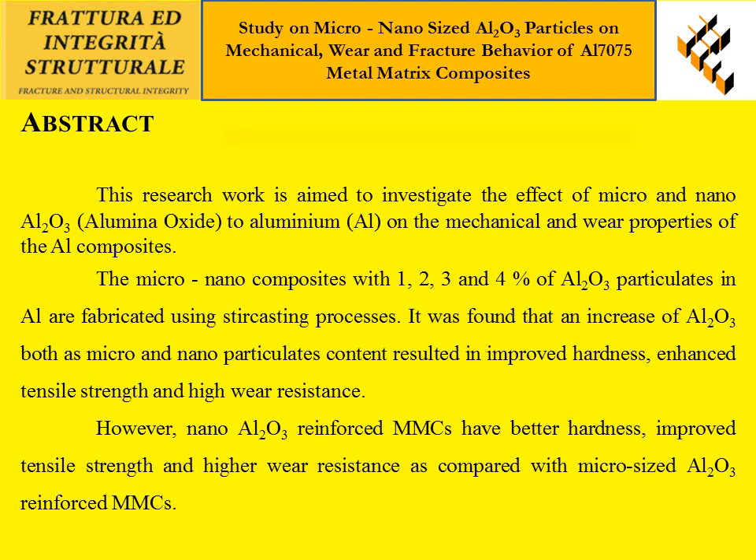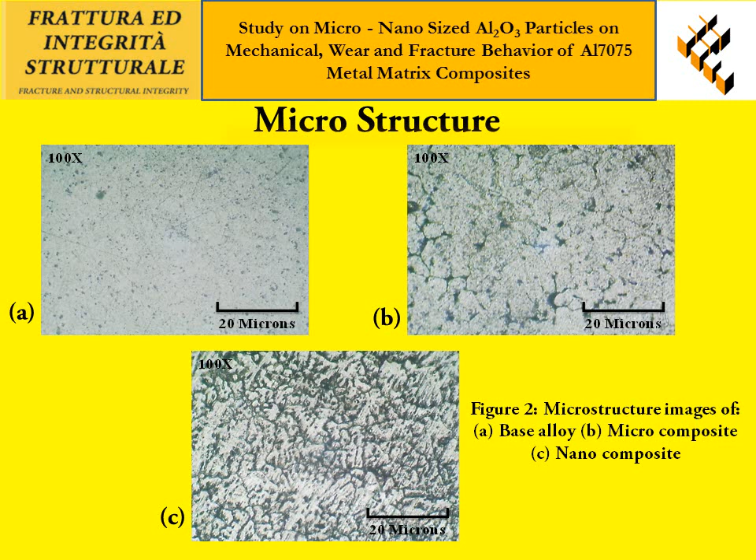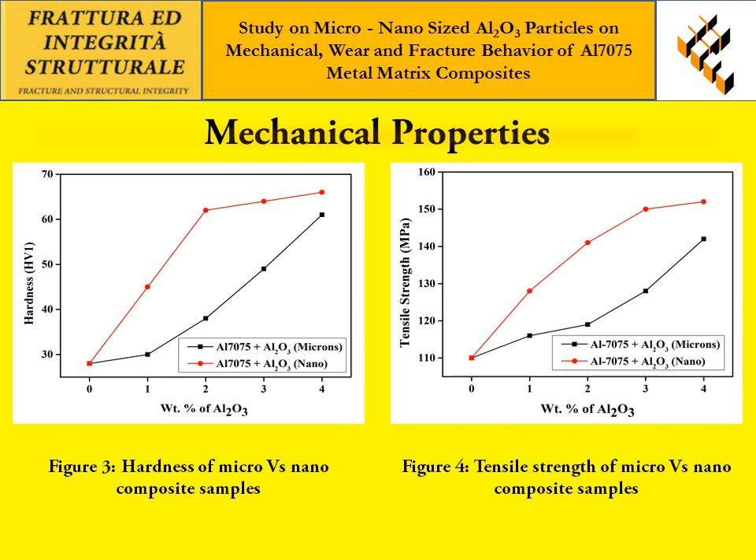Figures 3 and 4 show the hardness and tensile strength of micro versus nano composite samples. From the outcome, it is observed that composites and nanocomposites exhibit better mechanical properties compared to the base matrix. It is also observed that nano-sized Al2O3 particulate reinforced composites exhibit better mechanical properties compared to micro-sized Al2O3 particulate reinforced composites.

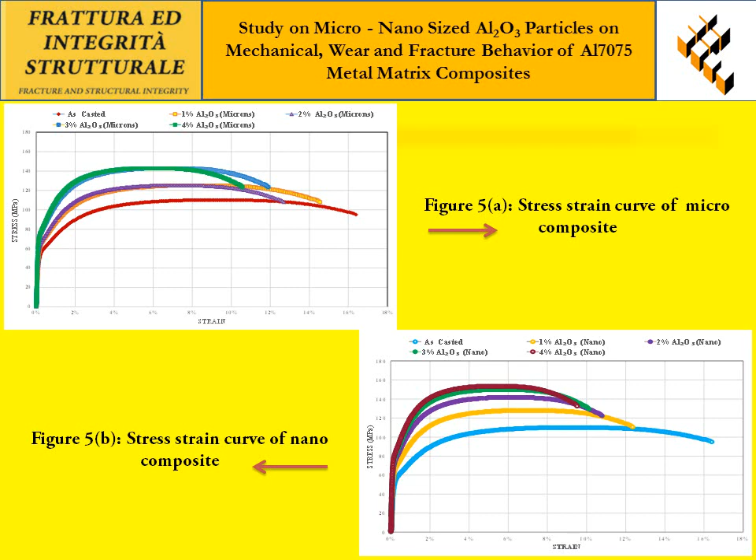Figures 5a and 5b show the stress-strain curves for the micro and nano composites. It is observed that the base alloy has the highest plastic strain and also exhibits the least resistance to plastic deformation.

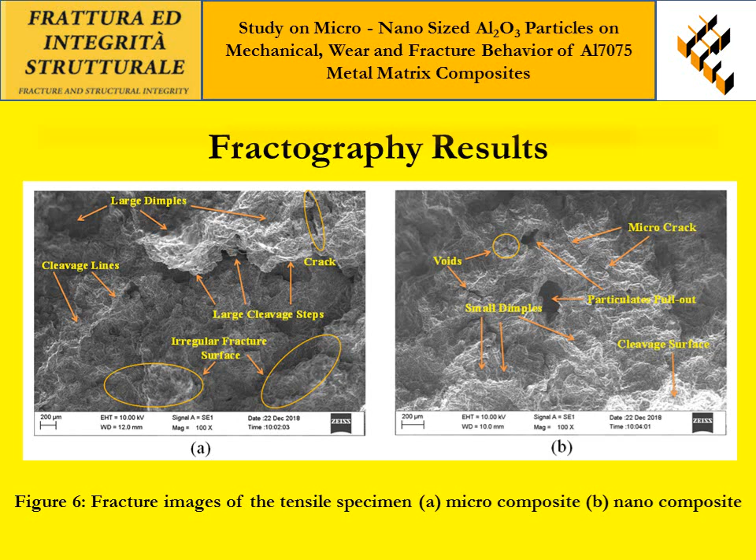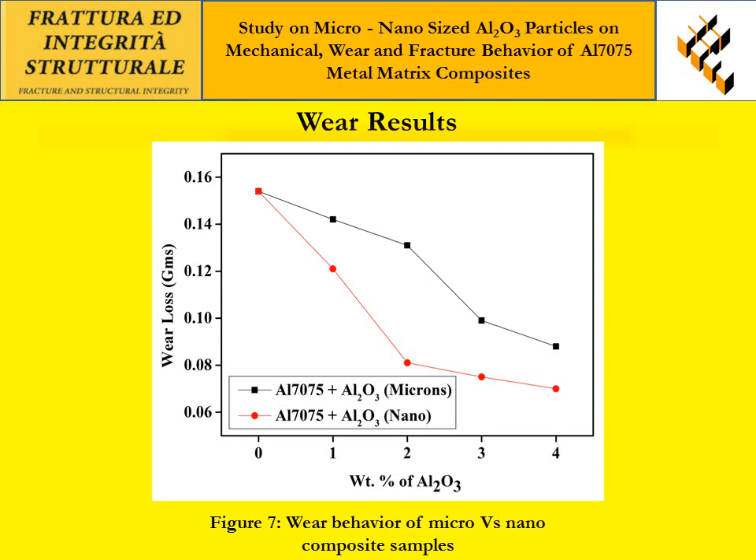Figure 7 shows the wear rate of micro versus nano composites. It is concluded that adding hard ceramic particulates like Al2O3 into aluminium considerably enhances the wear resistance of MMCs. The nanocomposites show improved wear resistance when compared to the microcomposites.

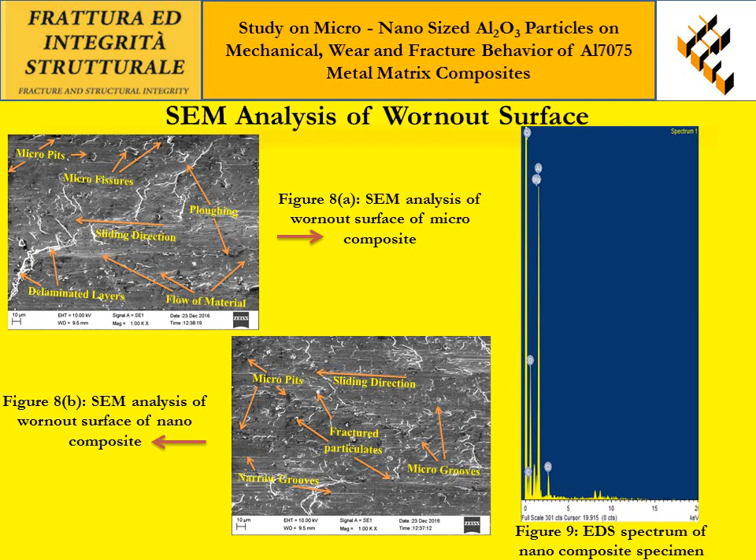Figure 9 shows the EDS study of nanocomposites. The outcome reveals the presence of aluminium, magnesium, carbon and oxygen. A small amount of oxygen, termed O, was detected in the EDS study due to the existence of Al2O3 content during composite preparation.

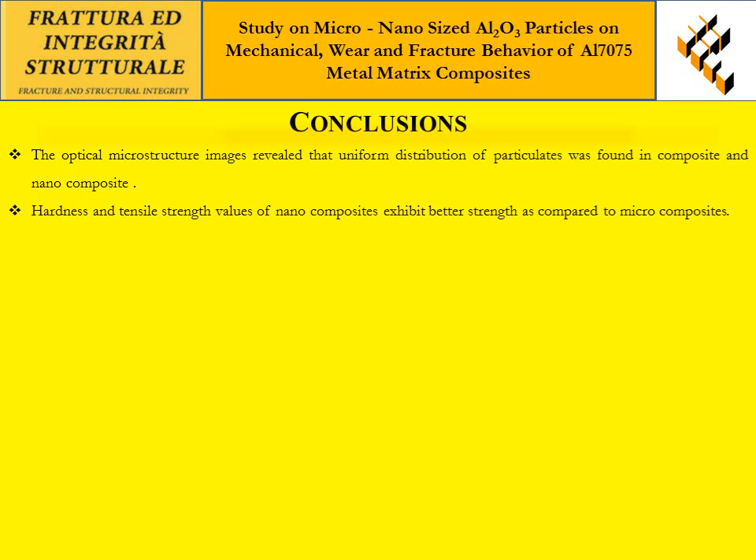Conclusions. Microstructure reveals the uniform distribution of Al2O3 particulates within the composites and nanocomposites. Hardness and tensile strength values of nanocomposites show better strength compared to microcomposites. From the fracture surface, it is revealed that high ductility was witnessed within the UTS studies.

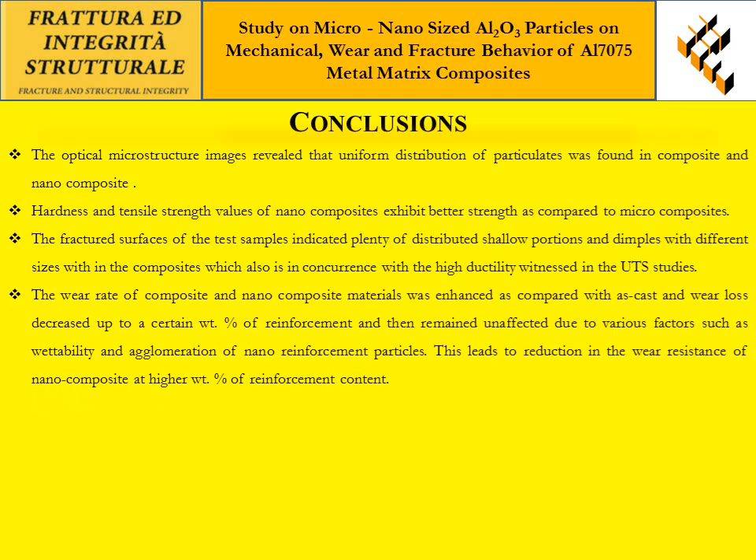The wear resistance of nanocomposites was found to be better when compared to the microcomposites. The worn-out surface of the MMC signifies that the wear mechanisms are delamination and ploughing. The EDS study reveals the presence of Al2O3 content within the composites.